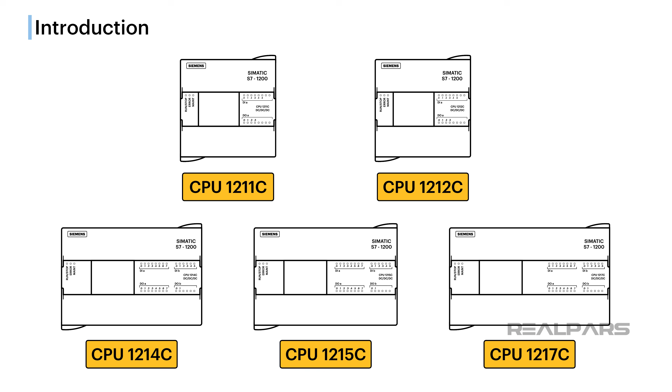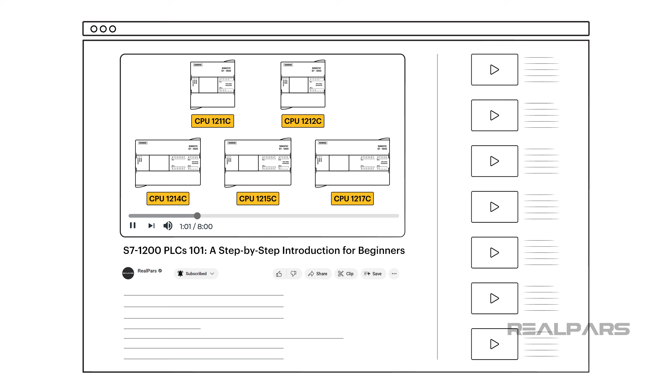Now, let's dive into our main topic. Choosing the right Siemens S7 1200 PLC for your project can be challenging, but with the right guide, it can be easy. If you saw our previous S7 1200 PLC 101 video, there are multiple models to choose from, including expansion modules. This video will provide a step-by-step guide on choosing the right Siemens S7 1200 PLC and expansion modules for your project. We'll also go over a small project example using the step-by-step guide.

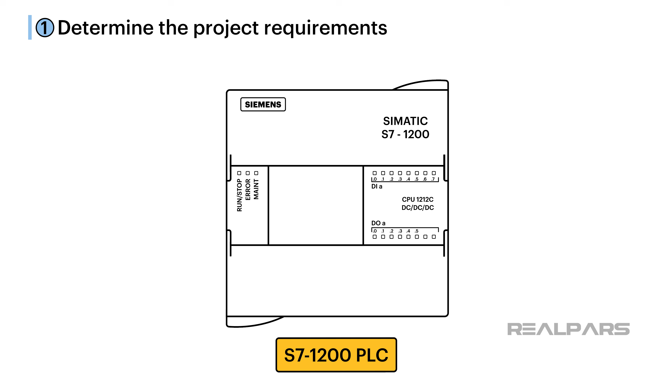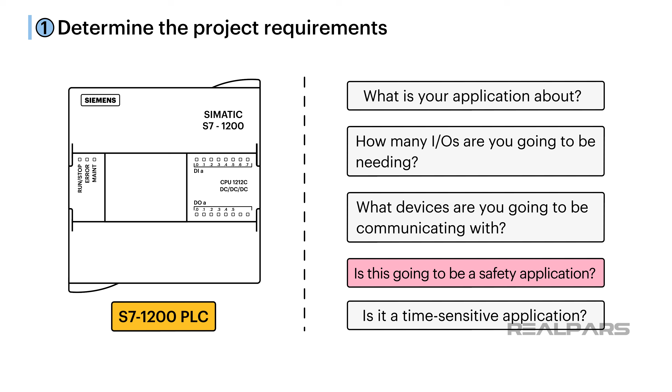The first step in choosing the right S7 1200 PLC is determining your project requirements. Some questions you can ask yourself are: what is your application about? How many I/Os are you going to be needing? What devices are you going to be communicating with? Is this going to be a safety application? And is it a time-sensitive application? The first step will give you an overall picture of your project needs.

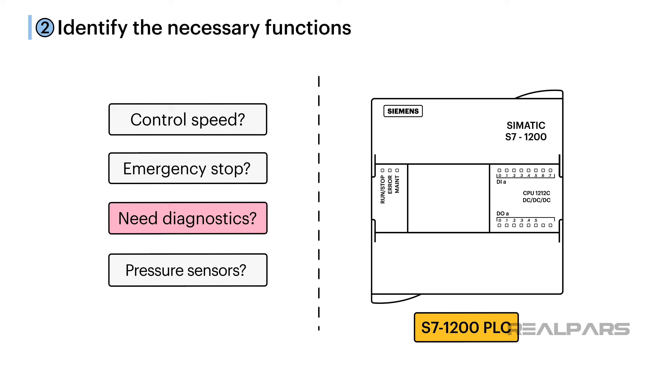The second step would be to identify the necessary functions for your application. For example, do you need to control speed and direction? Will you need an emergency stopping function? Do you need the PLC to provide diagnostics? Maybe you need to maintain the flow rate using pressure sensors. Doing these first steps will narrow down the types of models to consider.

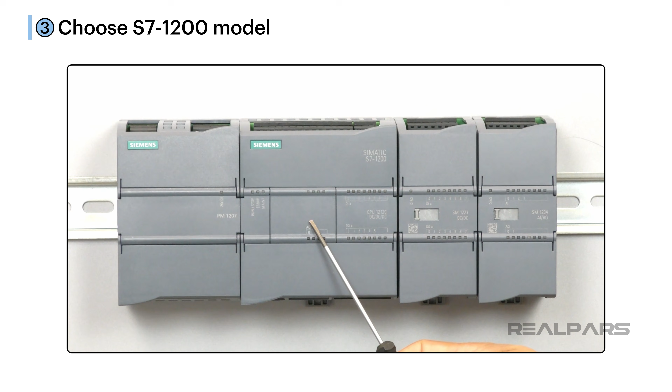The third step is choosing the right S7 1200 model and the expansion modules and boards if required. With your functions and requirements laid out, you can select the CPU model, expansion module, and boards to reach your requirements. Take note of the I/Os already integrated into the CPU module and the max number of modules and boards the CPU can take. If you need a list of the CPU and I/O module options, we provided a link in the video description.

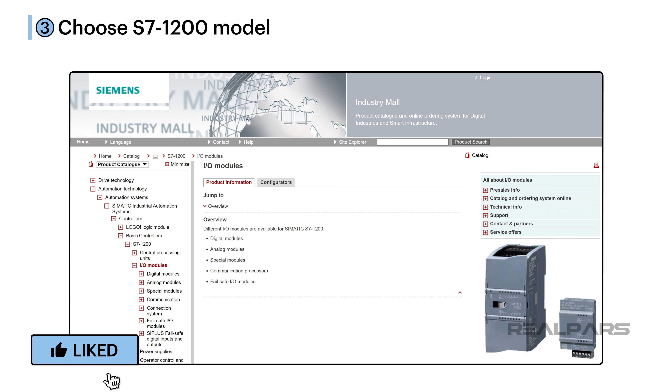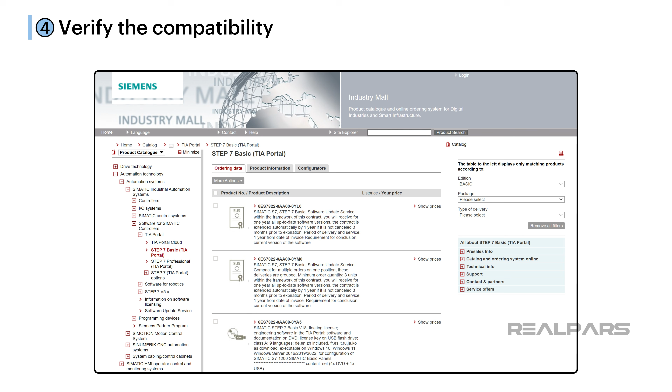With the fourth step, you need to verify the compatibility. This means you get the correct software and devices compatible with your S7 1200 PLC. All S7 1200 PLCs will need Step 7, Basic Edition, to start programming. We will also provide a link to the list of Step 7 software in the video description. Be sure to filter the Edition drop-down to Basic.

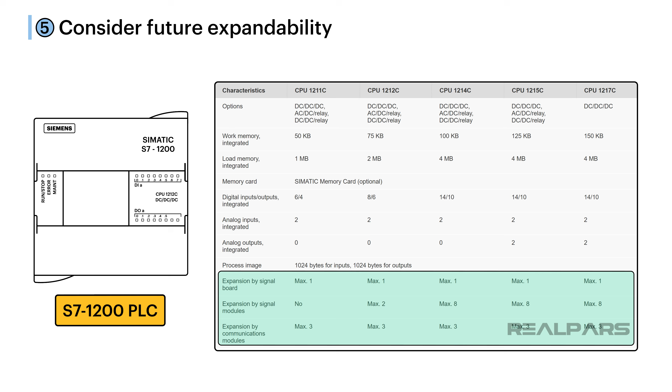The fifth step is to consider future expansions on your S7 1200. Make sure to know your I/O point limit and expansion limit on the model you choose. Should you anticipate adding more I/Os into your system, your S7 1200 will be ready to handle the extra I/O points and modules. A good general rule is adding about 15 to 20% more I/Os than what your project currently needs.

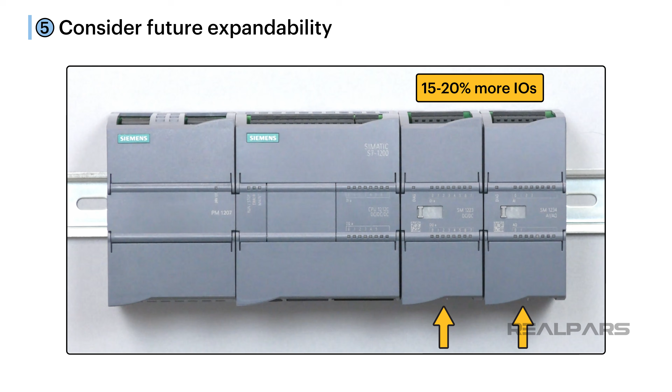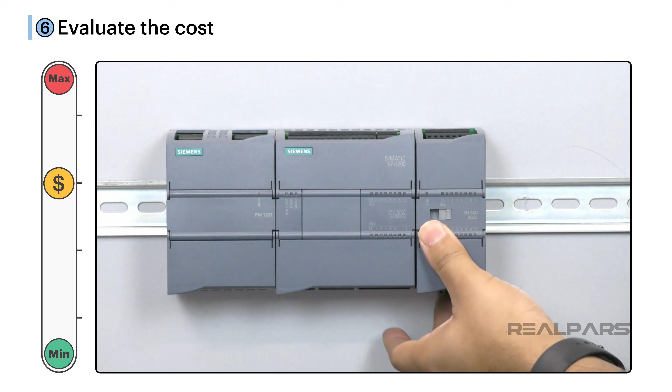Step 6 is evaluating the cost of your S7 1200 PLC and the associated components. Are the components within your budget and provide good value for the features and performance? You can do an estimated cost breakdown on your selected components to get an idea of the value. Remember to take into account the smaller components, such as the power supply, cables, and connectors.

The final step is consulting with experts.

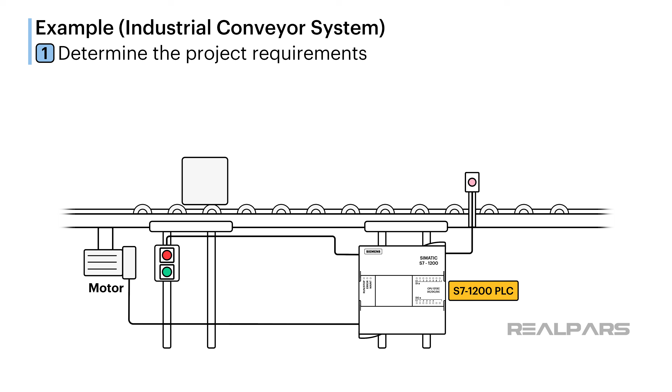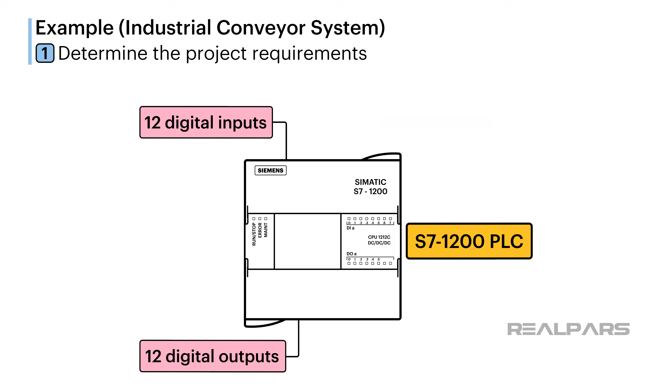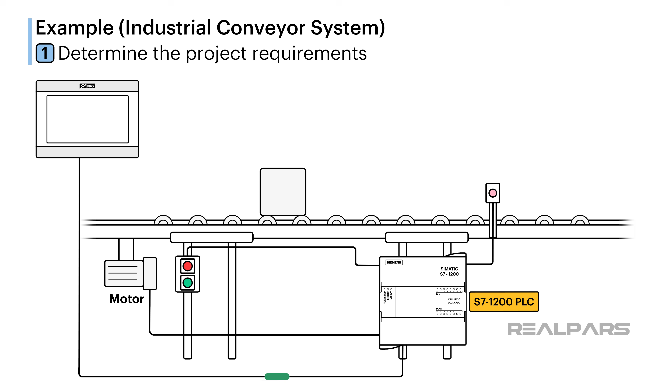First, let's determine the project requirements. The industrial conveyor system will require the PLC to control and monitor the movement of products on the conveyor, such as boxes, packages, or pallets. The PLC will need approximately 12 digital inputs, 12 digital outputs, 4 analog inputs, and 2 analog outputs. It will need to communicate with the Human-Machine Interface, or HMI, over Profinet, and it will also need to provide diagnostics information to maintenance personnel.

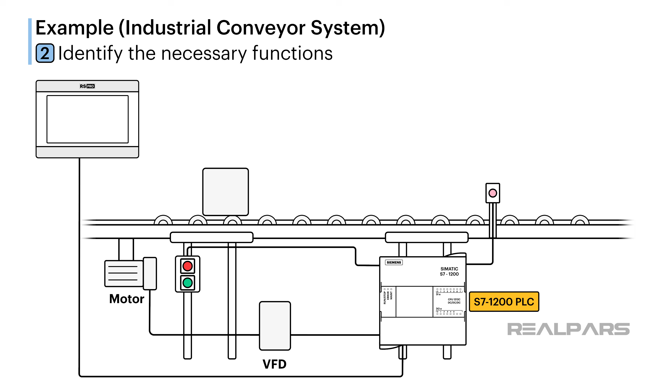Second, let's identify the necessary functions for this application. The PLC must be able to perform the following functions: control the speed and direction of the conveyor motor using a variable frequency drive, or VFD, based on the input from a speed sensor and a position sensor. Stop the conveyor in case of emergency using a safety switch and a safety relay.

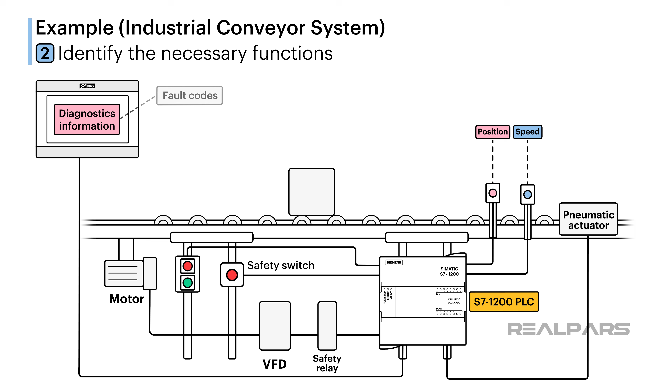Control activation of other devices, such as pneumatic actuators, based on the position of the products on the conveyor. Communicate with an HMI over Profinet to display status information and receive commands. And provide diagnostic information to maintenance personnel, such as fault codes, maintenance alerts, and sensor readings.

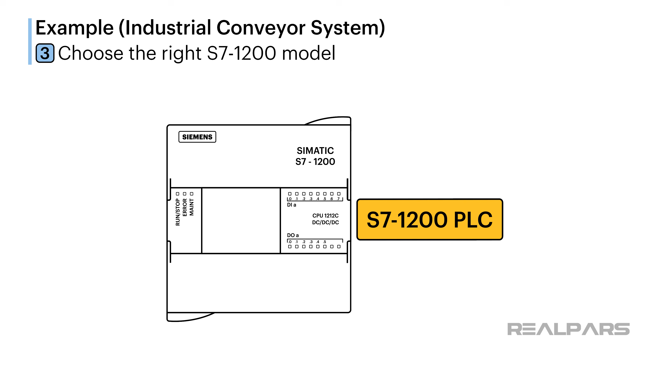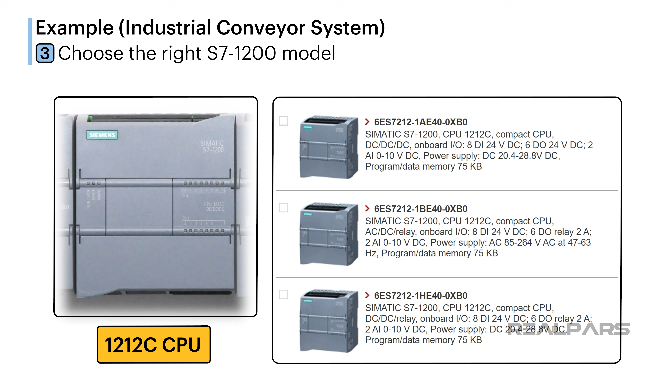Third, we can now select the right S7-1200 model. Based on the project requirements and functions, we can select the following S7-1200 PLC model. The 1212 CPU will provide 75 kilobytes memory capacity and a max of 2 expansion modules, giving it sufficient memory and expansion for the application. We will choose the version that needs DC power and has transistor outputs.

The 1212 CPU will already have 8 digital inputs, 6 digital outputs, and 2 0 to 10 volt analog inputs. We would need to add some expansion modules to reach our I/O requirements. The first expansion module is the SM1223. We will choose the version with 8 digital inputs and 8 digital outputs with transistors.

The second expansion module is the SM1234. We will choose the version with 4 analog inputs and 2 analog outputs. This module can work with either voltage or current signals. And the S7-1200 supports Profinet protocol, enabling communication with the HMI.

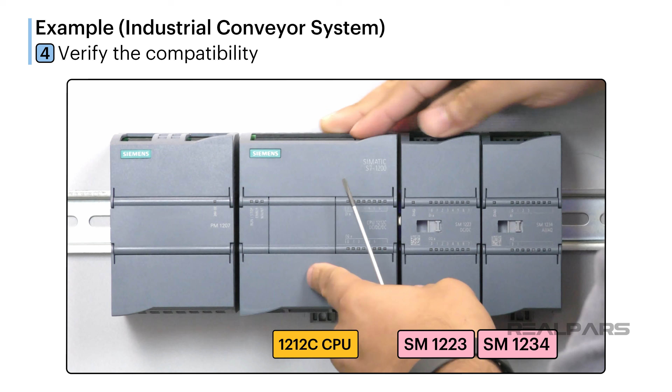With the CPU and expansion module chosen, we can now move into the fourth step: verify compatibility. The S7-1200 will be compatible with the Siemens TIA Portal software. You will need the Step 7 Basic software. It will also communicate with the HMI through Profinet.

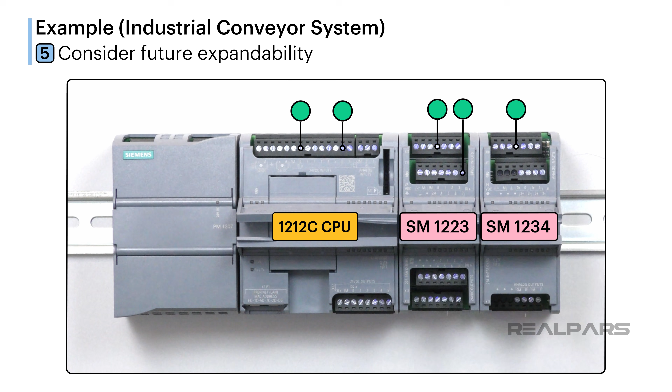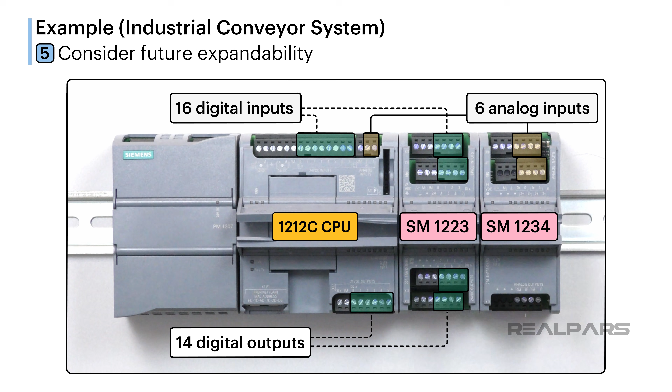Fifth, we consider future expansions. If we need to add more sensor inputs or drive an extra device, we know our system's total I/Os. Our total I/O points are 16 digital inputs, 14 digital outputs, 6 analog inputs, and 2 analog outputs. That leaves us with an extra 4 digital inputs, 2 digital outputs, and 2 analog inputs. We also have space to add a board for more I/Os.

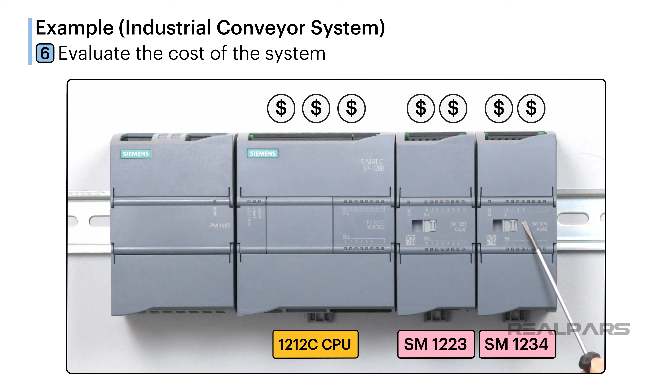Sixth, we look at our complete S7-1200 system and evaluate the cost. We'll need to consider the following parts: CPU 1212, SM1223 expansion module, SM1234 expansion module, Step 7 Basic software, power supply, and wiring terminals and cables.

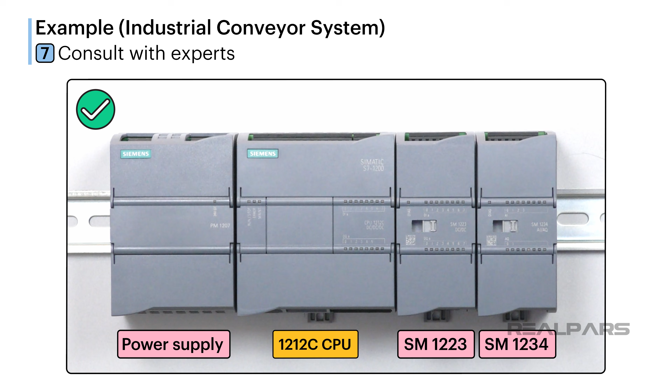The final step is consulting with an expert. You might need more guidance on selecting the right S7-1200 PLC or have questions about it. The RealPars Engineering Team and Technical Solutions Center can assist with S7-1200 PLC selection, configurations, and programming.

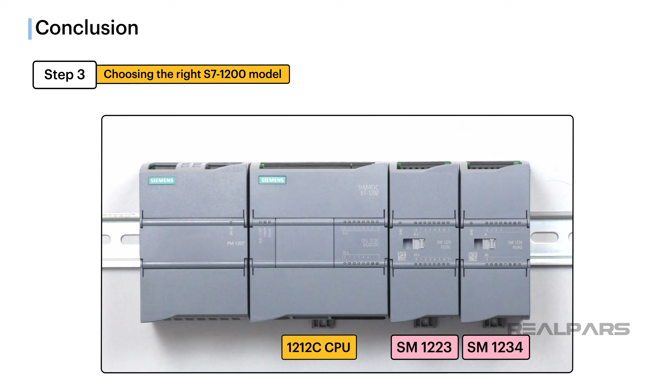In this video, we have learned that following these steps can make the selection process easier for an S7-1200 PLC that best fits our project, providing reliable and efficient operation. Specifically, we learned to determine your project requirements and necessary functions, choose the right S7-1200 CPU and expansion modules and boards, check to verify compatibility, consider future expandability, evaluate the cost of the system, and consider consulting with an expert on your selection or application.